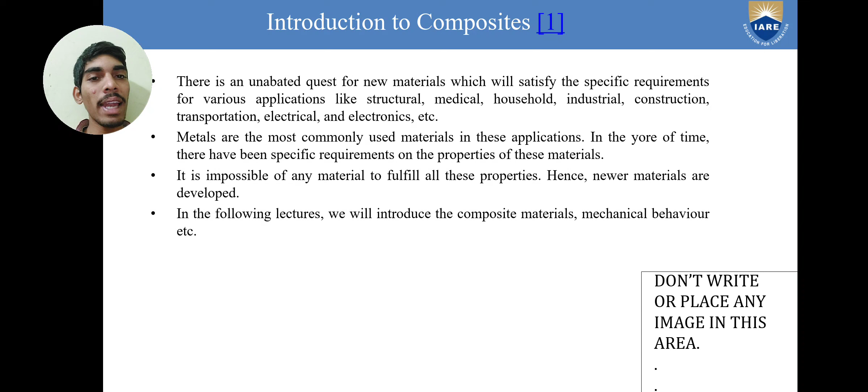Over the years, there have been specific requirements on the properties of this material. It is impossible for any material to fulfill all these properties, hence new materials are developed. In the following lecture, we will introduce the composite materials, mechanical behaviors, etc.

Now let us discuss about the definition of a composite material. A composite material is defined as a material which is composed of two or more materials at a microscopic scale and has a chemically distinct phase. Thus, a composite material is heterogeneous at a microscopic scale but statistically homogeneous at macroscopic scale.

The materials which form a composite are called the constituents or constituent materials. The constituent materials of a composite have significantly different properties. Further, it should be noted that the properties of the composite formed may not be obtained from these constituents.

However, a combination of two or more materials with significant properties will not suffice to be called a composite material. In general, the following conditions must be satisfied to be called a composite material. The combination of materials should result in significant property changes. One can see significant changes when one of the constituent materials is in platelet or fibrous form.

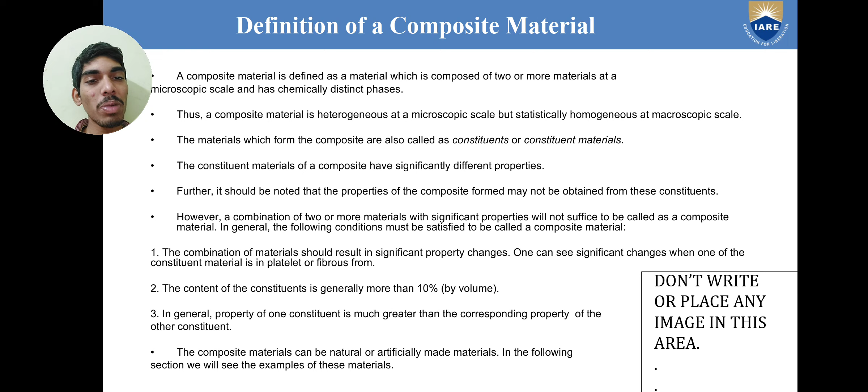The content of the constituent is generally more than 10%. In general, a property of one constituent is much greater than the corresponding property of the other constituents. The composite materials can be naturally or artificially made materials. In the following section, we will see the examples of these materials.

For example, a material which needs high fatigue life may not be cost effective. So a manufacturer will always tend to manufacture a product according to the mechanical properties they need, or depending upon the requirement of the application. And now let us discuss the different requirements of the applications given below.

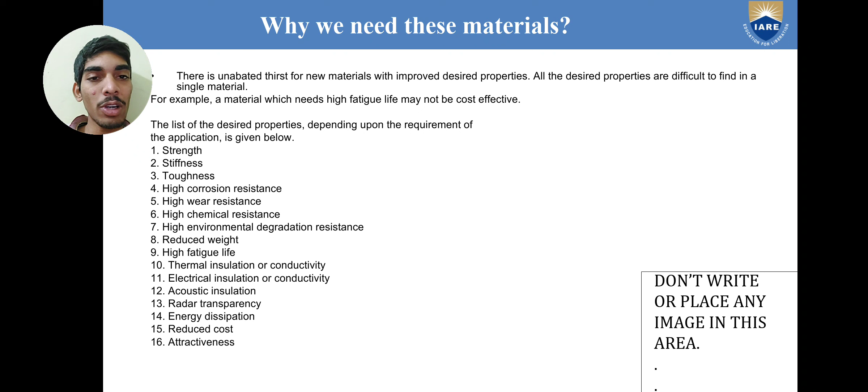That is strength, stiffness, toughness, high corrosion resistance, high wear resistance, high chemical resistance, high environmental degradation resistance, reduced weight, high fatigue life, thermal insulation or conductivity, electrical insulation or conductivity, acoustic insulation, radar transparency, energy dissipation, reduced cost, attractiveness.

So now, before getting into the topic, I am supposed to discuss the mechanical properties, because in order to understand the mechanical behavior of composite structure, we should know what are the mechanical properties which are present in our daily life. So let us discuss the different types of properties. The important mechanical properties of a material are as follows.

Strength. It is the ability of a material to resist the external applied force without breaking or yielding. Stiffness. It is the ability of a material to resist deformation under stresses. The modulus of elasticity is a measure of stiffness.

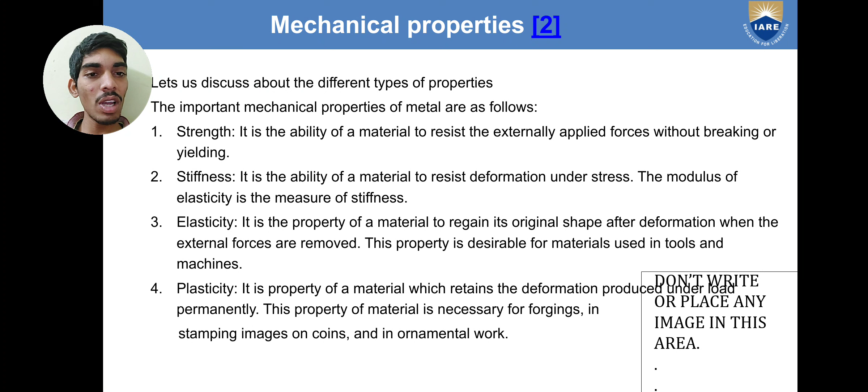Next, elasticity. It is a property of material to regain its original shape after deformation when the external forces are removed. This property is desirable for material used in tools and machines. Plasticity. It is a property of material which retains the deformation produced under load permanently. This property of a material is necessary for forging, in stamping images on coins and in ornament work.

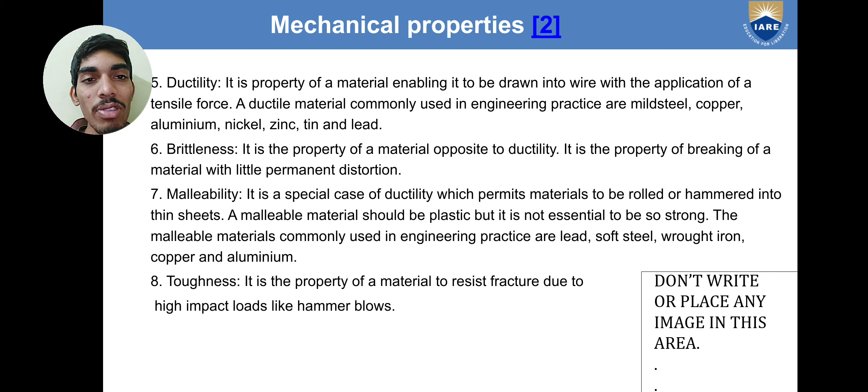Ductility is a property of metal enabling it to be drawn into wire, and brittleness is a property opposite to ductility. It is a property of breaking with little permanent distortion. And malleability is a property in which, by external force, we are able to form it into rolls or sheets.

And toughness is a property of a material to resist fracture due to high impact loads like hammer blows. And next, resilience is a property of the material in which it absorbs an amount of energy.

And creep is defined as: when a part is subjected to constant stress at high temperature for a long period of time, it will undergo a slow and permanent deformation called creep. And next, fatigue. When a material is subjected to repeated stresses, it fails at stress below the yield point stress. Such type of failure of a material is called fatigue.

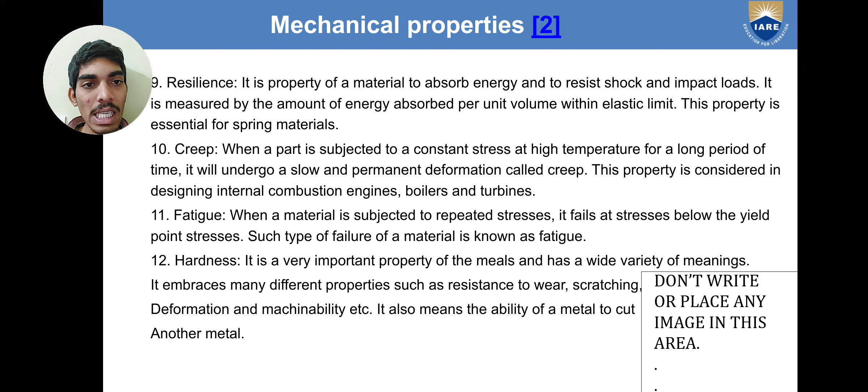Hardness is a very important property of a material and has a wide range of meanings. It embraces many different properties such as wear resistance, scratching, deformation, and machinability, etc. It also means the ability of a material to cut another material. So now we have discussed the general mechanical properties.

Now we will discuss different mechanical properties of composite material. The mechanical behavior of composite materials can be assessed with the help of mechanical properties of composite under different loading. Now let us discuss it. Tensile strength. In composite materials, the tensile strength depends on the volume of fiber reinforced material and the type of reinforced material. The composite materials can withstand high tensile loading if the fiber reinforced material is of high tensile strength.

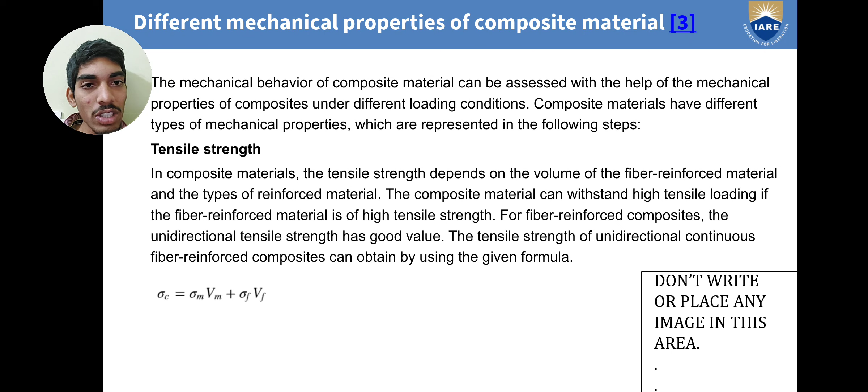For fiber reinforced composite, the unidirectional tensile strength has good value. Here, sigma C represents the tensile strength of composite, sigma M represents the tensile strength of base.

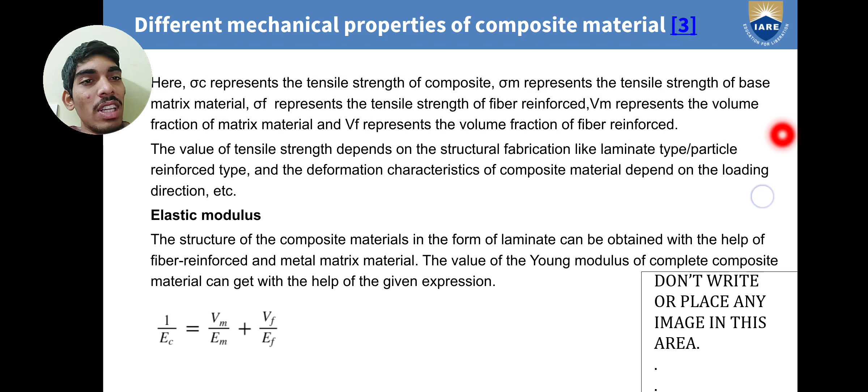Next, the value of tensile strength depends on the structure of fabrication, like laminate type, particle reinforced type, and the deformation characteristic of composite materials depends on the loading direction. Elastic modulus. The structure of the composite materials in the form of laminate can be formed with the help of fiber reinforced and metal matrix. The value of Young's modulus of complete composite materials can be obtained with the help of different expressions. The expression is given below.

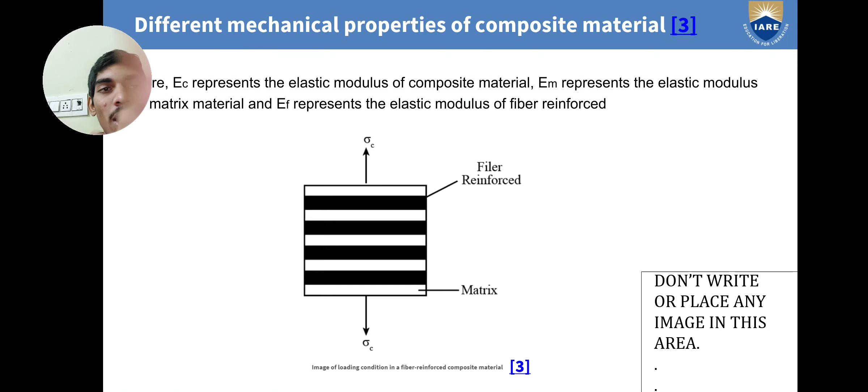In this figure we are able to understand it, supposed to be different material, in which EC represents the Young's elastic modulus of composite materials, EM represents the elastic modulus of material matrix, and EF represents the elastic modulus of fiber reinforced.

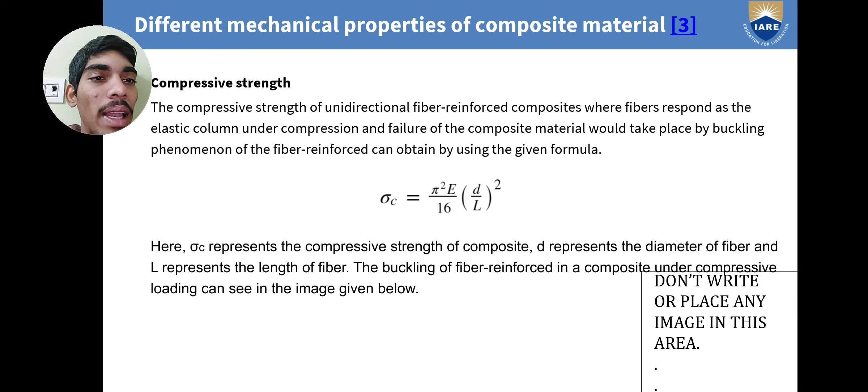And now let us discuss the compressive strength. The compressive strength of unidirectional fiber reinforced composite, where fiber responds as an elastic column under compression and failure of the composite materials would take place by buckling phenomena of the fiber reinforced, can be obtained by the given formula. Here sigma C represents the compressive strength of composite, D represents the diameter of fiber, and L represents the length of the fiber. The buckling of fiber reinforced in a composite under compressive load can be seen in the image below.

And next, let us discuss stiffness. The fibers in the composite materials are made up of elastic material with good stiffness property and high stiffness values. The stiffness of a matrix material is less than the stiffness of fiber. So the composite materials have a good stiffness. Temperature resistance. The resistance of composite materials against high temperature is also good. The composite material can be used to make equipment that is required to operate in high temperature zones.

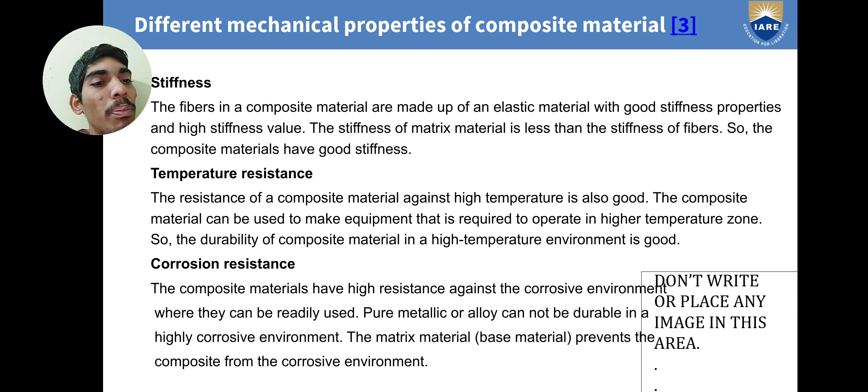Corrosion resistance. The composite materials have high resistance against a corrosive environment where they can be readily used. Pure metal or alloy cannot be durable in a highly corrosive environment. The matrix material, base material, protects the composite from the corrosive environment. And next, crack propagation. Whenever cyclic load acts on a composite material, there would be the possibility of fatigue failure. Due to this, the initiation and propagation of crack occurs in the direction perpendicular to the load axis. Further, the crack propagates and the failure of the composite takes place.

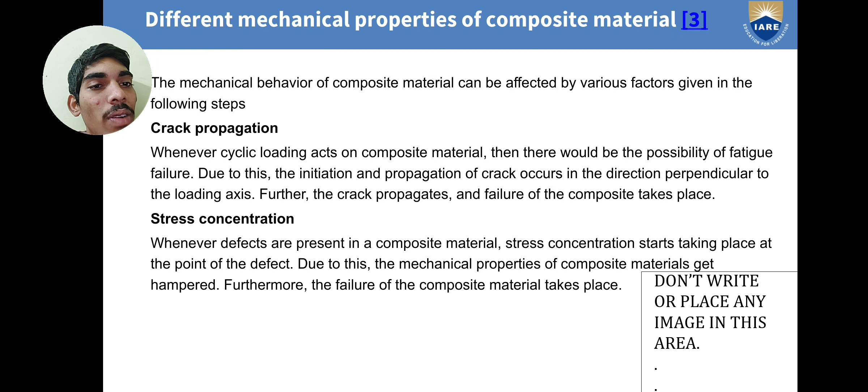Stress concentration. Whenever defects are present in the composite material, stress concentration starts taking place at the point of the defect. Due to this, the mechanical properties of composite materials get hampered. Furthermore, the failure of composite materials takes place.